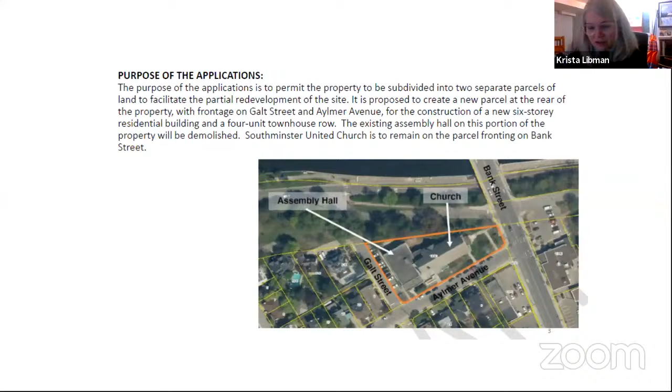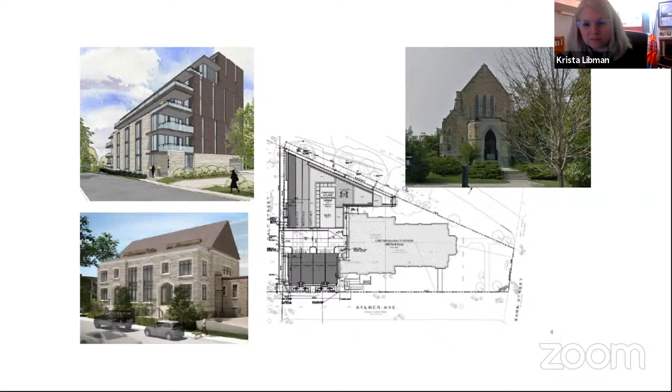So the application is to, as noted, sever the property into 2 parcels. The first will have 20.15 meters of frontage on Aylmer, 50.58 meters on Galt Street. This is the proposed parcel for development. And the other will have 14.61 meters on Bank, 62.22 meters on Aylmer, and this is the existing church.

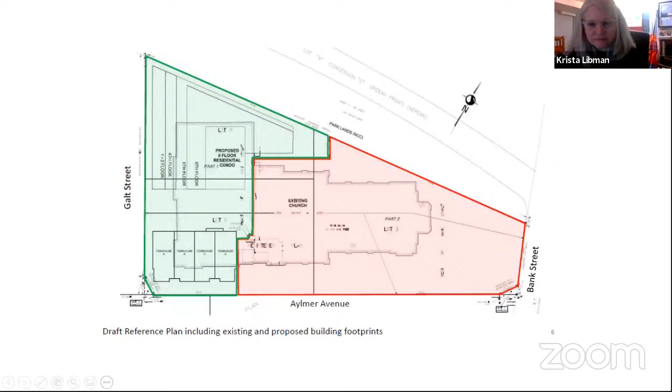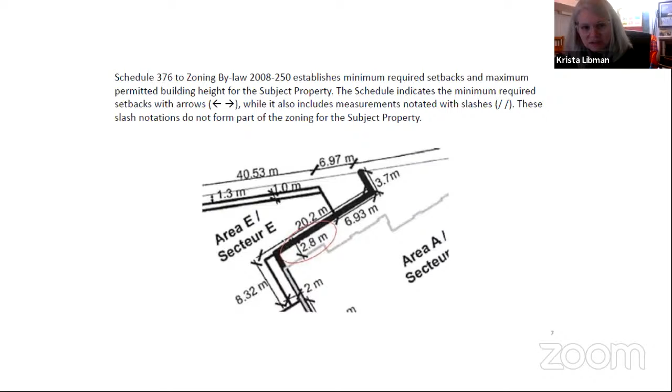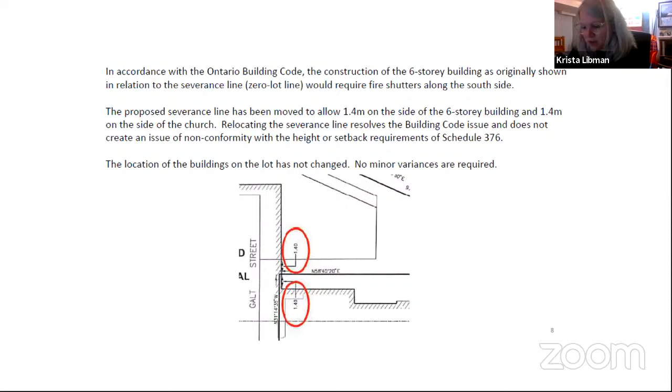So we received and reviewed comments from Building Code Services, Planning, Forestry, Hydro, and Rogers. I was able to discuss the comment with Forestry and with Planning. Planning issued a revised report and we are in concurrence with all of the proposed conditions.

I just wanted to clarify with Forestry Services that the requirement for their tree report will be dealt with through site plan, and the comment was submitted to the committee for information purposes only, not to request a condition. One condition I would like to discuss with the committee, though, was submitted by Building Code Services.

I'm just looking for the wording here. Anyway, I can't find it, but it has to do with a spatial separation analysis. And I would like to request that the committee impose that not as a condition of the severance. The spatial analysis will have to be completed in order to obtain a building permit, and as noted, we're going through site plan control and plan to conform with the building code, of course.

So just a bit more information about that: the portion of the building that will be demolished is a condition of the severance. And we would like to deal with the spatial separation analysis through the building permit, if possible. Otherwise, there were no other comments. So, next slide.

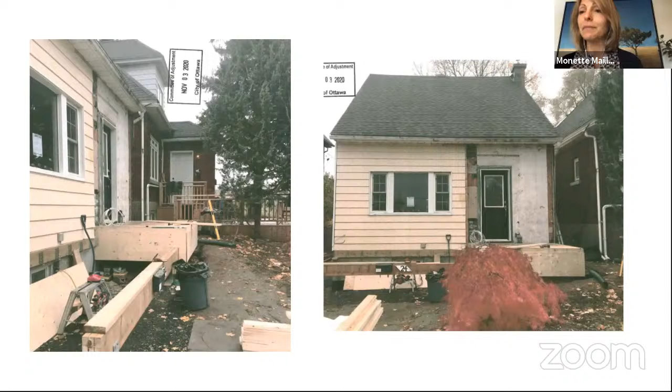So yes, we have a letter in support from one of your neighbors. All right, any questions from the applicant, from the members of the committee?

All in favor of this application as applied?

Good luck with enclosing your porch. Thank you very much, have a great day. Thank you, bye-bye, bye-bye.

Next applications we will deal with today are items 3 and 4 on the list: 630 Tweedsmuir Avenue, and 257, 259, 261 Dover Court. I believe Mr. Robinson is the agent for the applicant. Is he there?

Hello, Mr. Robinson, for the record, your address please. 100 Palomino Drive, Ottawa. Okay, and we will have to administer the oath.

Do you solemnly swear or affirm that the notice provided to you as part of the application process and by the committee was posted at the property to which the application applies, for the prescribed number of days before the hearing, and clearly visible and legible during the entirety of that time? I do swear. All right.

This application seeks to subdivide the property into 3 separate parcels of land. The existing detached dwelling will be demolished for the construction of a new detached dwelling on 1 parcel and a semi-detached dwelling on the other 2 parcels. It would also permit reduced lot areas and front setbacks.

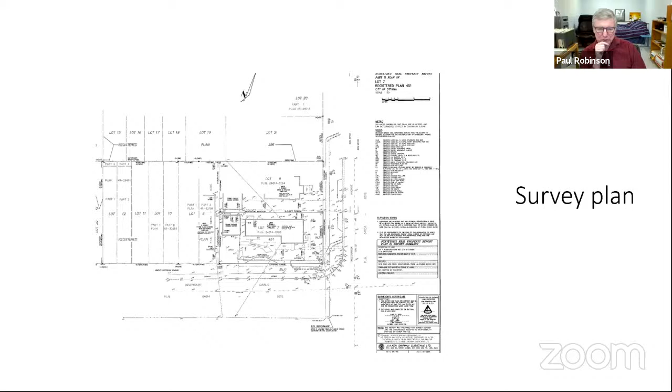This is the draft 4R plan. Parts 1 and 2 would be semi-detached units. They would have a front yard setback of 3 meters. The bylaw calls for a front yard setback of 5.54 meters. As you can see, these lots are relatively short in depth.

Part 3 would be a new single family home. It would also have a front yard setback of 3 meters as measured to Dover Court and 4.5 meters as measured to Tweedsmuir. The parking space for part 1 would be on the left-hand, or west, side of that part. The parking space for part 2 would be on the right-hand side of part 2. And the parking space for part 3 would be along the north property line, alongside the north wall of the house, which would be on part 3.

We're requesting consent applications and also minor variances for front yard setback, the same front yard setback for all 3. On the semis, it would be a request for reduced lot area. The requirement is 170 square meters, where those parts are each 141 square meters. The requirement for a single detached house in this R3S zone would be 270 square meters of lot area, and part 3 is 222 square meters.

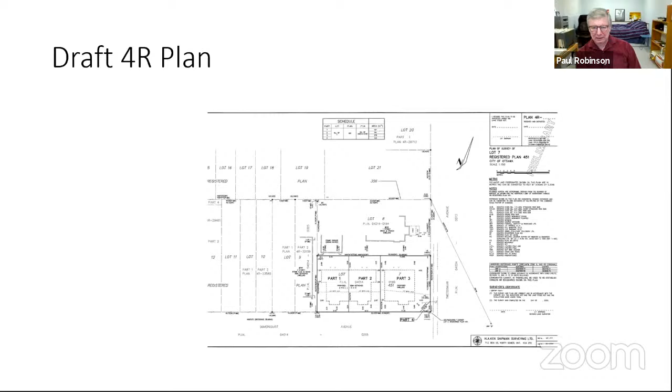Part 4 on this plan is a daylighting triangle that we had shown from the beginning. It's also listed as one of the conditions, so that provides for additional visibility. Could you go to the next slide, please?

So this is the site plan. The units are relatively small in terms of their footprint. The semis have a footprint of about 652 square feet, so about 61 or 62 square meters. The single family home on the corner has a footprint of 801 square feet, about 75 square meters. So the footprint of the units is proportional to the size of the lots being proposed here.

One question, Mr. Robinson — I'm looking at the driveways for the semis and the single. What are the dimensions of those parking spaces in front of the units? They are compliant, 2.6 by 5.2 meters. That's for the semis and the single. The single shows the parking space behind the north wall of the single, with an X across it, and a driveway leading to it. Okay, please continue. Thanks.

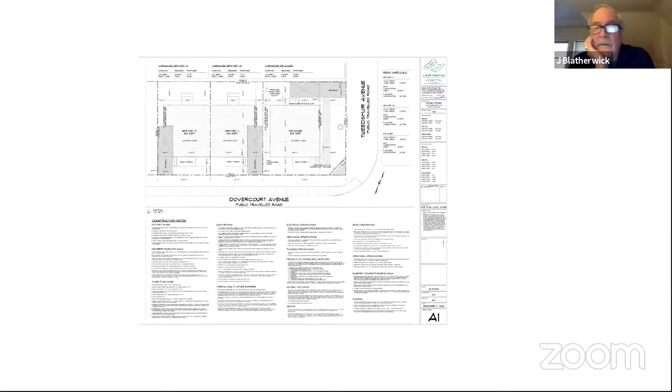For the single, they all have front porches, and the single also has a walkway going from the porch along the Tweedsmuir frontage of the property. Next slide, please.

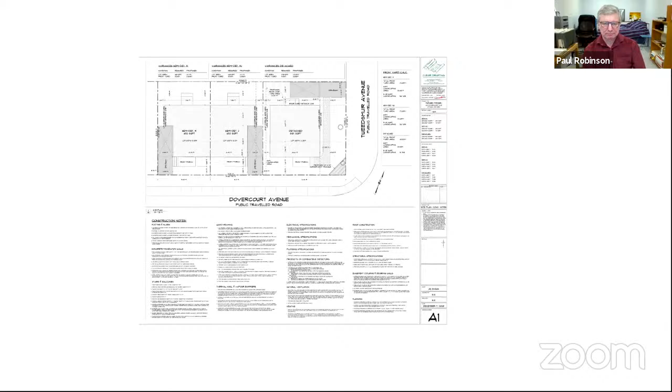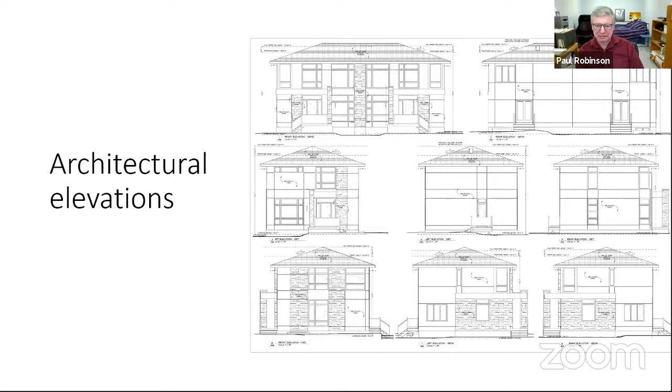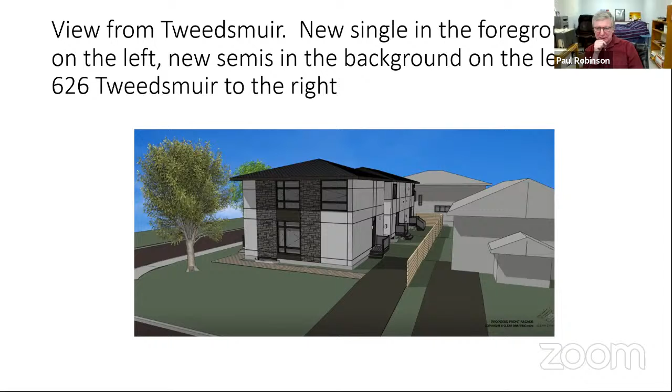Next, please. This is the view from Tweedsmuir, looking back towards the single family home in the foreground and the semis in the background. Further in the rear are the semis recently built, and on the right is the single family home at 626 Tweedsmuir.

So there's a number of examples like this in the area. Both Duncairn and Tweedsmuir and Dovercourt have a number of semi-detached properties on them. The zoning allows singles and semis. Staff are in support of the application. They had no concerns, and I'm available for questions.

I think there are several questions. Mr. Wilder, you had a question. Thank you, Mr. Robinson. I have a concern with the front yard setback of the 3 meters that you're requesting.

I've been by the property, I've been by the property on Duncairn. You have a sidewalk here in Dovercourt. You've seen one of the comments put in by a resident who lives over at 273. The properties on Duncairn had a setback, gave it an extra meter plus, in terms of the setback from the street. Yours is much closer to the sidewalk. You could actually work this site a lot better and build a really nice semi-detached, notwithstanding what was built over on Duncairn. And I think the dimensions could be different.

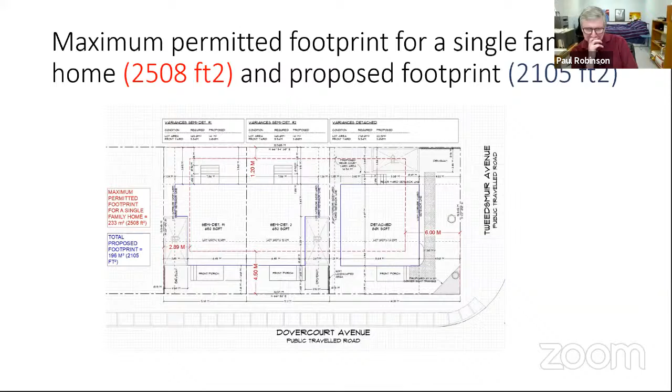So the rendering would probably be the best one. It would be the tree closest to the sidewalk.

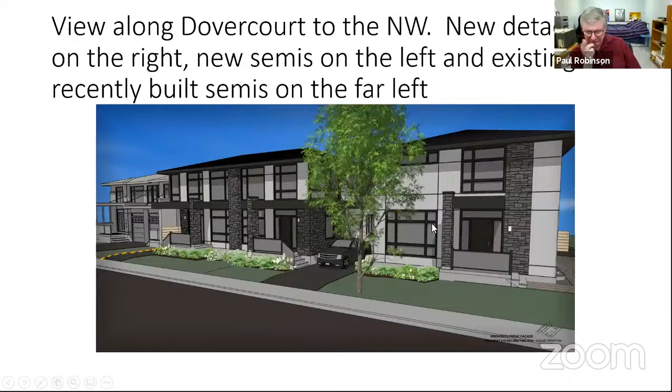Okay, and then the tree that's in the background, yes, is that tree, yes. The tree that was in the background in the previous rendering is right on the mutual city-private property line. Okay, and that one's coming down?

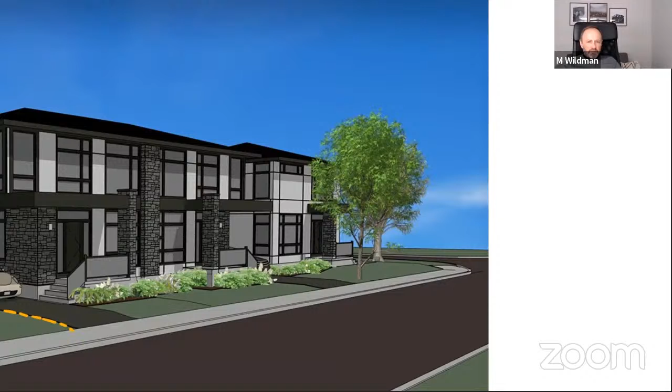No, the two that are in this rendering are staying. Okay, all right, and so how far is roughly your excavation from the two trees that are staying?

The tree shown here in the foreground, on the city property line, is probably going to be about 4 or 5 meters away, and the shared one would be at least that as well. Though the forester did not have any issues with those; he thought that with the proper protective measures during construction, those could be retained.

Okay, I know we now have a forester here, so if we have any follow-up questions we can do that. Those are my questions, Mr. Chair. Thank you. Okay, Mr. Wilder again.

I guess this rendering is a little misleading. You're saying that your client's property next door, the setback is how much from the street? 5.5. So you're going from a setback that's 5.5, and you're asking...

What concerns me here is the depth of this property, as opposed to your client's property next door for the semi, which is obviously a much deeper lot than what you're dealing with here at the corner. Notwithstanding the property on Duncairn, I'm really concerned. I think you're making smaller lots here because of the reduced setback.

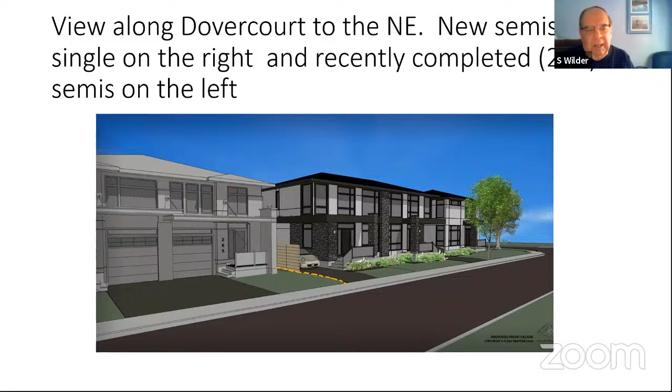And with the requested setback, which should typically be 15 feet or 5 meters, you're asking for 3 meters compared to your client's property next door. I still have some concerns, sorry.

Mr. Robinson, could you articulate the 4 tests for this application? Sure, please. The 4 tests of a minor variance.

The variances are to maintain the general intent and purpose of the official plan and zoning bylaw, and are to be desirable for the appropriate use of the land and are minor in nature. The proposed development does not require variances related to side yard setbacks, rear yard area, or building height. The variances are considered minor in nature, and with the zoning permitting this use within the existing lot fabric, the intent of the zoning is maintained, and the variances requested are minor in nature.

The R3 zone contemplates a range of residential uses such as singles and semis, and the proposed lots are consistent with the general pattern of development in the area. As a small-scale intensification of the property from a single-family home to a new single-family home and semi-detached units, the purpose is in conformity with the official plan designation for the property, which is general urban area, and it maintains the general intent and purpose of the official plan, which allows for a variety of ground-oriented housing forms.

One thing I'd like to say in response to Mr. Wilder's comments: I understand that these lots are smaller in lot area than the lot area of the property to the west, which was developed for semis, and the semis being proposed are on a smaller lot, but the ratio of the footprint of the buildings to the lot area has been brought down as well.

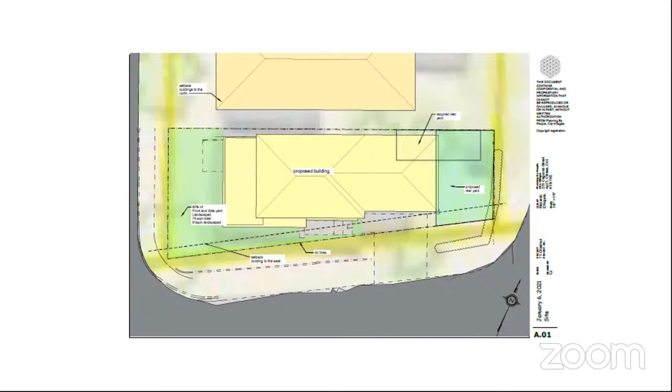Sorry Chris, the wrong photo is being shown, you're on slide 2. I'm on slide 2, oh dear. Just hang on a second here. Okay, so we're on slide 2. This shows... back to slide 1. There you go. Okay, now I'm back on slide 1.

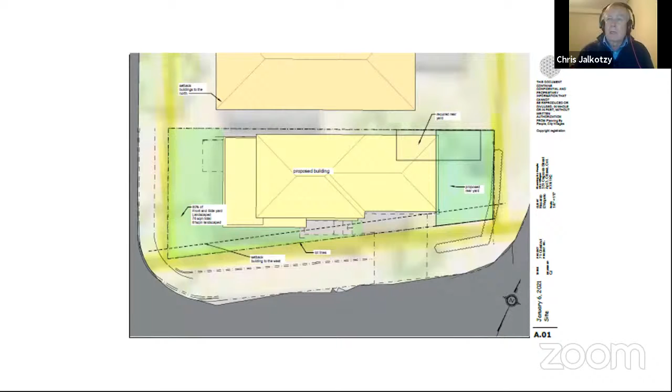If you're looking at this slide, you'll see a dotted line. The property line is shown with a green area to the right and left of it that shows the landscaped areas. The proposed building is shown in yellow. The dotted line shows an approximate line of all of the homes on Springhurst on the north side of Springhurst, and this property generally lines up with that same setback. Normally, because this is a corner lot, the rear yard setback would be an indented portion you see on the upper right side of the property. The client has gone to a more regular rear yard that is more in keeping with the neighboring properties.

The parking is accessed off of Springhurst, which is the long lot line for the property, and so it is a small percentage as intended for lots over 10 meters in width. The lot frontage for this property is on Chestnut, which is why the variance for the driveway and the garage, and also why the variance is on the rear yard. Also, because the property is a corner lot, the interior side yard requirement normally permits 0.6 meters, but because it's a corner lot, requires 1.2 meters. So that's most of the variances being asked for.

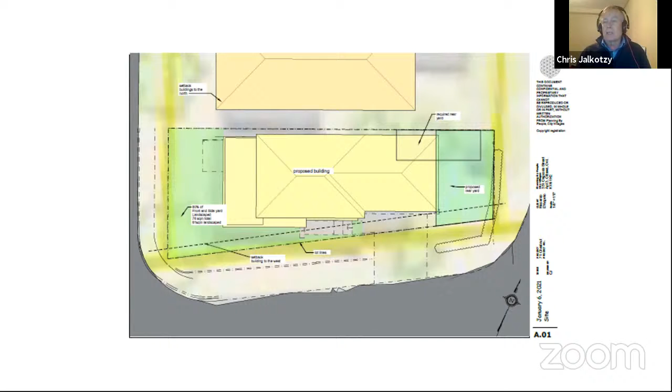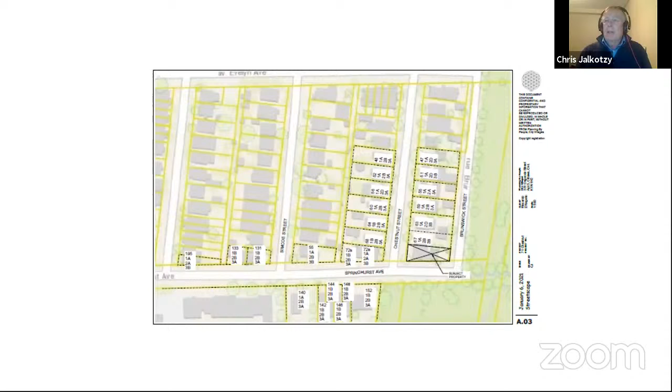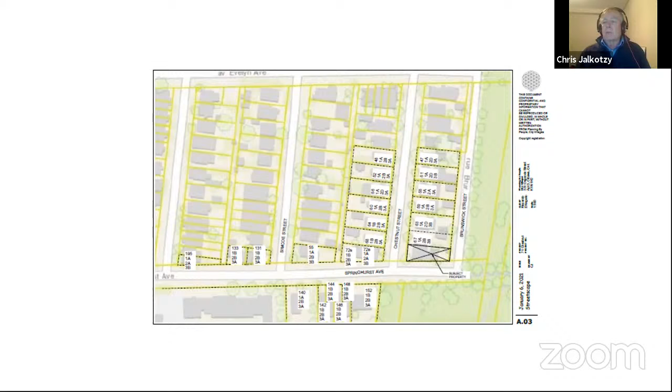This is part of the... now I've forgotten the word... streetscape analysis. It's interesting that we do have quite some driveways on Springhurst. We do not have garages, I should say, on Chestnut. However, the property does face Springhurst, so from a streetscape perspective, it is in keeping with the current streetscape on Springhurst. Next slide, please.

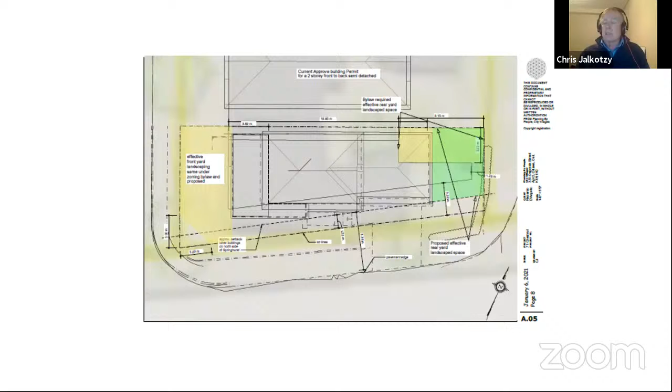Continue, next slide please. This gives you a little bit of a calculation around the landscaped areas, and the amount of landscaped area that would be permitted under the zoning bylaw if we built a zoning compliant building - they are fairly similar. I think that's all the slides.

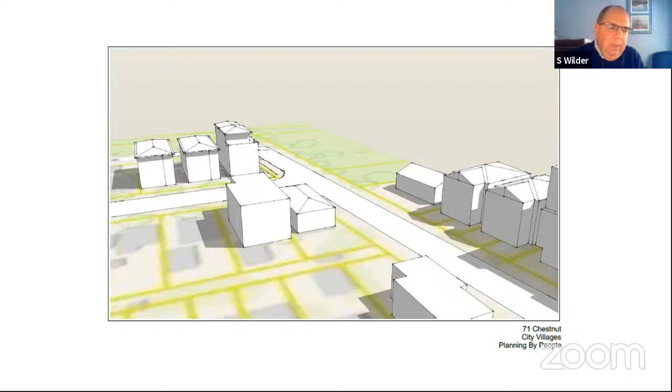And there were no applications for those because they were fully conforming from a variance perspective - they're both 4 feet off the lot line, 8 feet in between, etc.

They fully comply with the zoning bylaws, and building permits have been issued.

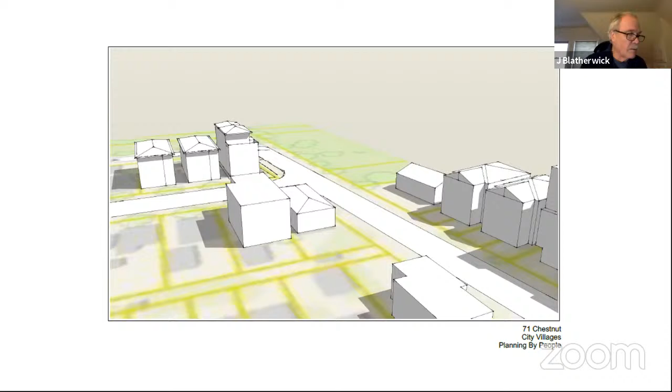So, Mr. Jalkotzy, how does this application meet the requirements of the four tests? So the four tests it meets. Can you put down the slide again so I can see you guys? Sorry, thank you.

So it meets the four tests. The variances are minor in terms of their overall impact. They also have desirable aspects in the sense that they allow for the construction of a building that has positive aspects in terms of the neighborhood. The use of the project is desirable. It meets with the intent of the zoning bylaw and also with the official plan.

All right. Mr. Chair, I'm sorry, that was not an explanation of how they meet the four tests. That was an assertion that they do meet the four tests. There is a difference.

I can expand on that. Number one, straight off, their impact is minor in terms of their impact on the site. The development proposal is desirable because it brings in a single family home that has two-story and three-story elements. It brings in landscaping elements and a number of positive elements to the property.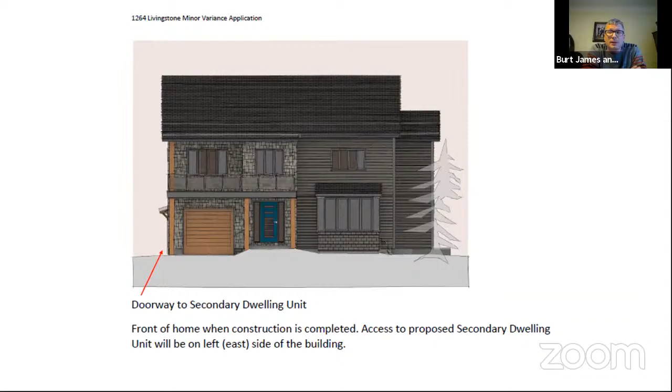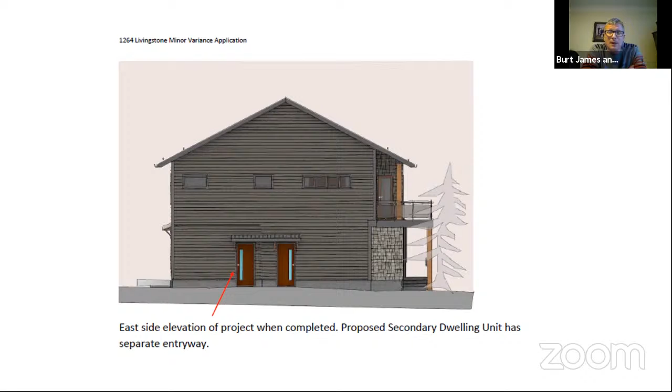Next slide, please. Slide 2 of the presentation shows the proposed secondary dwelling unit's entrance, which will be on the east side of the house and separate from our residence. We intend on placing some motion sensor lighting down the side of the building so that the tenants feel safe entering and exiting. Next slide, please.

Slide 3 shows the proposed layout of the separate entrance to the proposed secondary dwelling unit. Stairs will run along the east side of the building. All boundaries between the principal residence and the proposed SDU are fully compliant with building code in that they are fire rated, demonstrating our intent to comply in this manner.

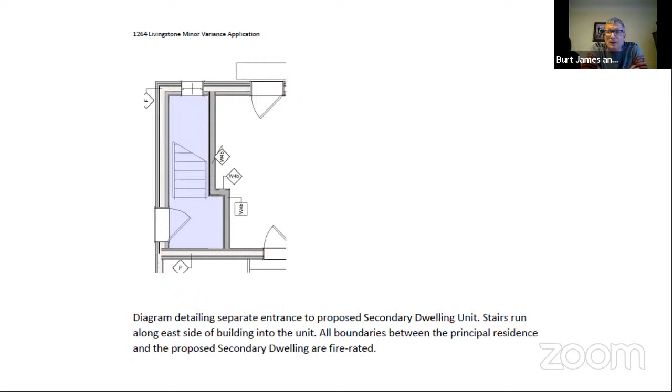And lastly, slide 4 shows the layout of the proposed secondary dwelling unit itself, which includes a living space, kitchen, dining, a 3-piece bathroom with on-site laundry, and a single bedroom.

We believe that a 1-bedroom self-contained living space would be attractive to potential tenants as an affordable way to live in this neighborhood. Many amenities are within walking distance, including grocery stores, pharmacies, and ready access to public transit, north, south, east, and west. We'd also note that we're just a short distance from the Billings Bridge shopping center as well.

We just wanted to note that as we were designing our home, we always committed ourselves to building a sustainable and climate resilient residence, and have taken steps throughout to manage our long-term environmental impact. Our home is being built to a net zero energy standard, including a solar array on the southern portion of the roof and a high efficiency greenhouse gas-free heating and cooling system.

The proposed unit will have its own water supply and a separate electrical panel, but due to the overall efficiency of the home, the HVAC will actually be integrated into the larger system. That concludes the presentation. What we're doing here is converting a portion of the new portion of the house into a secondary dwelling unit, and we're seeking consent from the committee to do so.

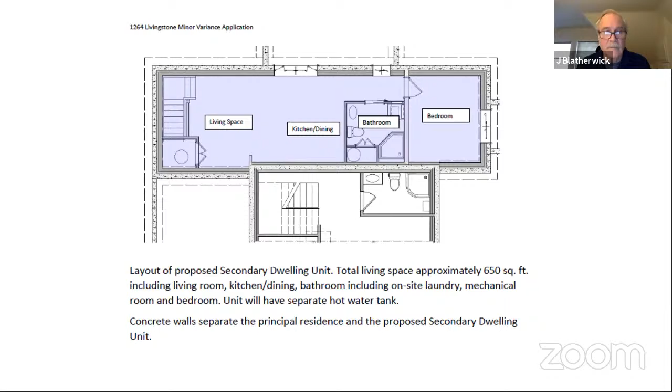Thank you. I believe Ms. McLean had a question for you regarding lot areas. I'm just concerned that there's no certifiable lot area shown on the survey plan, and that the covering letter talks about a lot area of approximately, and the 427 was stricken and 429 was inserted instead. Since the minor variance is to lot area, there is a risk to the applicant if this is not the correct lot area. So I just wanted to point that out and wondered if the applicant has obtained the lot area from the surveyor.

So this was a discrepancy that was noted. We had an official survey done. It came back as 427, and there was an error when we filed the original application that was corrected to 429 meters, which was specified to us when the city replied back as part of our building application. So as long as you're comfortable that that's the correct lot area, and you assume the risk that if it's not, the variance may not be of any value to you. I'll just leave it at that. Thank you. Thank you.

Any other questions from the members of the panel for the applicant? We note that secondary dwelling units are permitted as of right in the city. I'm glad to see that you're providing affordable housing for someone.

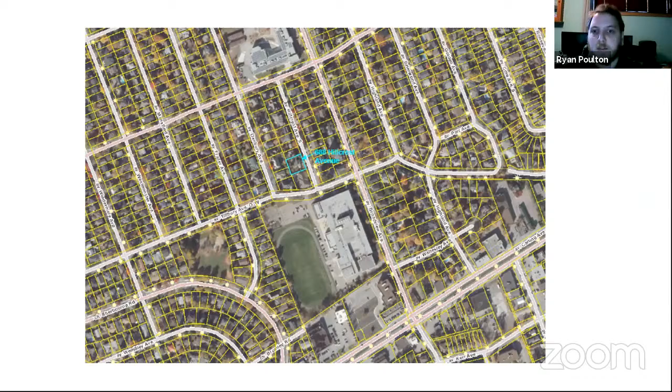Going down to slide 3 shows our severance sketches. Slides 3 and 4 are basically the same though. We're creating two equivalent lots, both with the same lot frontage and lot width, as well as the same lot area. These are simple severances, requesting to demolish the existing house and build two new single detached dwellings.

The proposed lots will have a frontage of 15.24 meters and lot areas of 478.4 square meters.

688 Hillcrest Avenue is in the general urban area, and it is zoned residential first density, subzone O. The lot width and lot area of the proposed lots meet the performance standards for the zone. Services are available along Hillcrest Avenue for the new detached dwellings. The severances will complement the pattern and scale of development along Hillcrest Avenue. The majority of properties are already developed with single detached dwellings that front onto Hillcrest Avenue.

That's a quick summary of the applications. We would also like to mention that we have received comments from Hydro Ottawa and Bell regarding requests for easements. In terms of hydro, I understand they can seek an easement without following a consent application process. However, Bell would require a consent application process. We would like to request amending this application to provide an easement for Bell as requested in their letter, and make that a condition of approval for these consent applications.

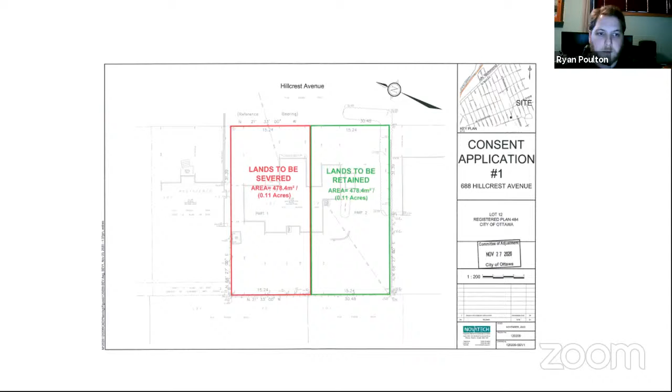So we're adding condition 5, that it's conditional on Bell being granted an easement. Yes, that would be our preference. What happened to hydro? My understanding is hydro can be granted an easement without having to go through this consent process, so that does not have to be a condition on approval of the severances. However, Bell needs that, so again I'd like to amend the application to provide Bell the easement that they need.

Okay, so we can add that as the fifth condition. There's cash in lieu of parkland, independent services, grading and drainage, and existing dwelling removed, and we'll just add Bell being granted an easement. I understand, to accede to their request. You're aware of Forestry Services comments?

Actually, no, we did not receive Forestry Service comments, sorry. Okay, their comment is there are several trees on the subject and adjacent properties protected under the tree protection bylaw. A tree information report will be required at the time of building permit application, and the houses, services, and driveways should be designed to allow for the retention and protection of those trees.

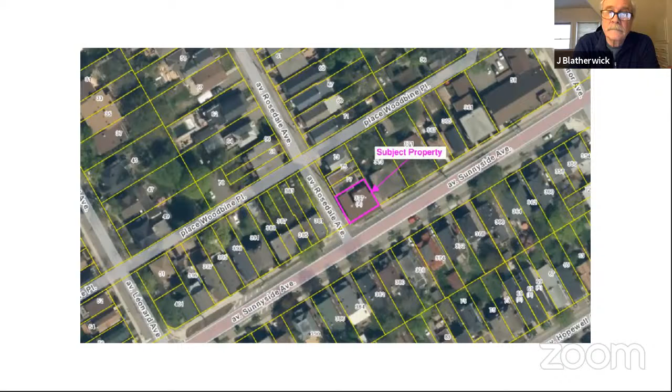There are also variances associated with the permitted projections into the corner side yard setback, included with respect to the corner lot. With respect to the middle lot, once again we've got a number of variances, including the lot area, and variances associated with the rear yard setback and rear yard area. And then we once again have variances with respect to the right-hand unit, or the third unit. All of those variances recognize existing conditions. If I can go to the next slide, please.

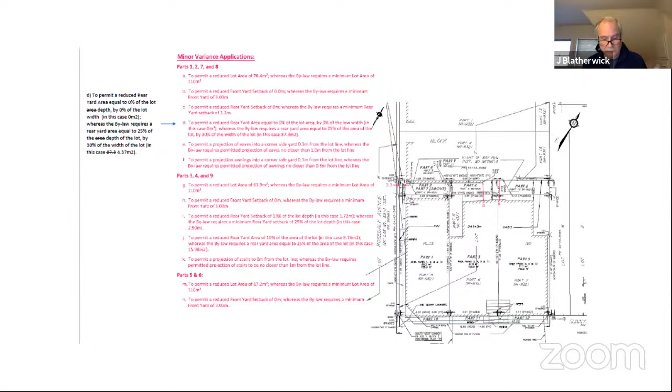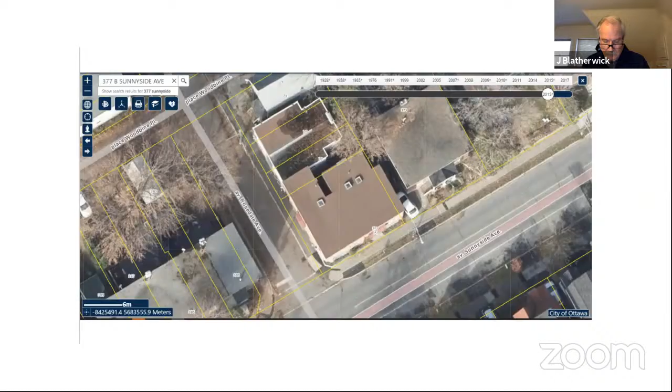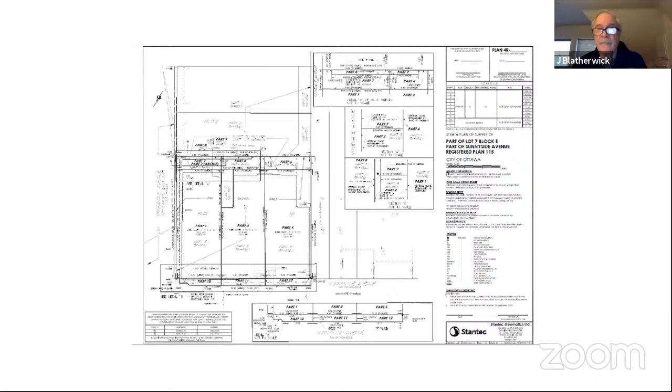Parts 10, 11, and 12 shown on this plan are the areas that would be subject to the encroachment agreement with the city. They do not form part of the 3 lots being created. Mr. Chairman, members of the committee, subject to any questions, I'd ask you to approve the variances with the amendment and the consents as filed.

Thank you, Mr. Chown. Mr. Wildman, you have a question or comment? Just, Mr. Chown, any indication of when the encroachment matter will be dealt with?

Well, it has been dealt with in principle. We just need to get the reference plan deposited, and then we can finalize the paperwork. Would you have any objection, Mr. Chown, to having a condition that that matter be concluded as a condition? With respect, I don't think it has anything to do with the application before the committee this afternoon.

Well, you're looking for an encroachment, are you not? Not from this committee, I'm not. Right, but your encroachment is triggered by what? It is an existing condition, not being triggered by these applications. And so your front yard setbacks and the like are not intertwined with that? No, because my front yard setback is an existing condition of 0. The encroachments are the projections, and they're not within the front yard.

So none of these variances that you're seeking — there's got to be a dozen or so — not one of them is affected by the encroachment? No, sir, it is not. They are not. Could I just ask staff's point of view on that, please?

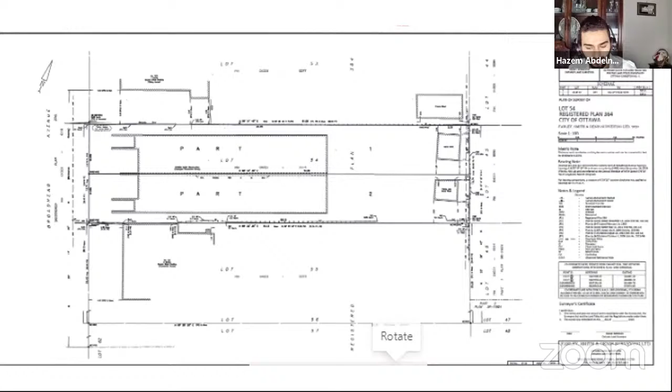Are there any questions regarding this application from the members of the panel? All in favor of granting this application as provided? Your application is granted. Good luck with your project. Thank you. And that being the end of the agenda, this hearing is adjourned.